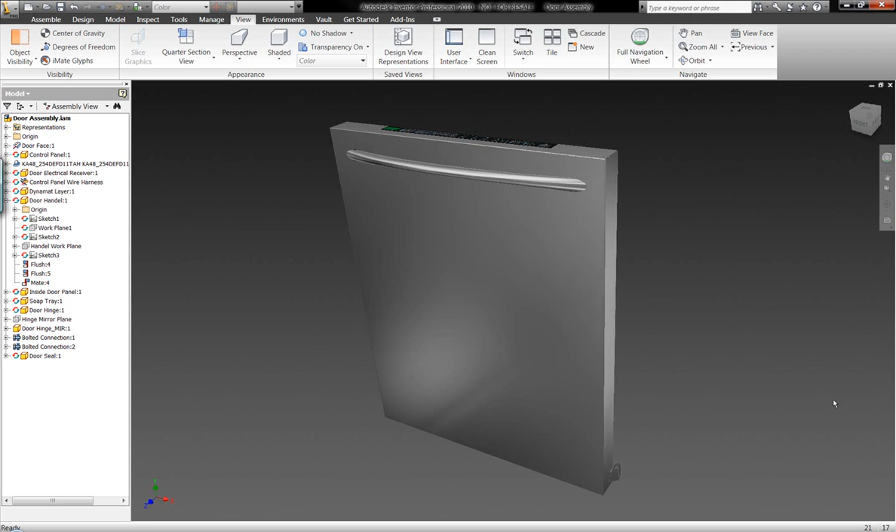What I want to take a look at now are some of the finite element analysis capabilities within Autodesk Inventor. With my dishwasher at home, one of the things that I often experience is my son climbing on the door itself, allowing too much force maybe applied on these hinges or different components of the door assembly. This might be a concern for a designer or a thought process of a designer of how to build more of a quality component. Now, one of the things that maybe I want to analyze is the overall assembly.

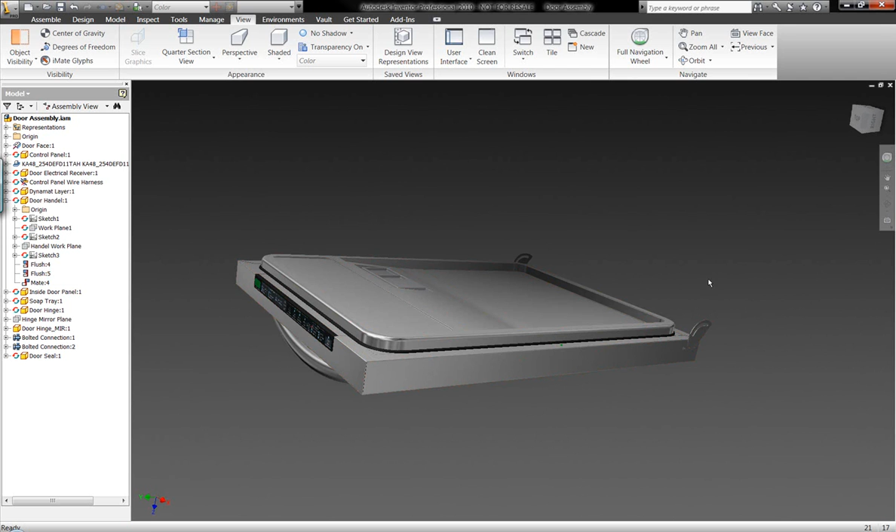Autodesk Inventor in an integrated environment allows me to analyze full-blown assemblies as well as specific part components within my assembly. I'm going to go ahead and open up a specific component to show you and introduce you to some of the finite element capabilities within Autodesk Inventor's interface.

As we work inside the environment in this part model, we can simply switch to our stress analysis environment without ever leaving Autodesk Inventor. Autodesk Inventor allows us to generate a variety of different types of finite element analysis studies. Here we're simply going to run a static study on this component or on this hinge piece of geometry.

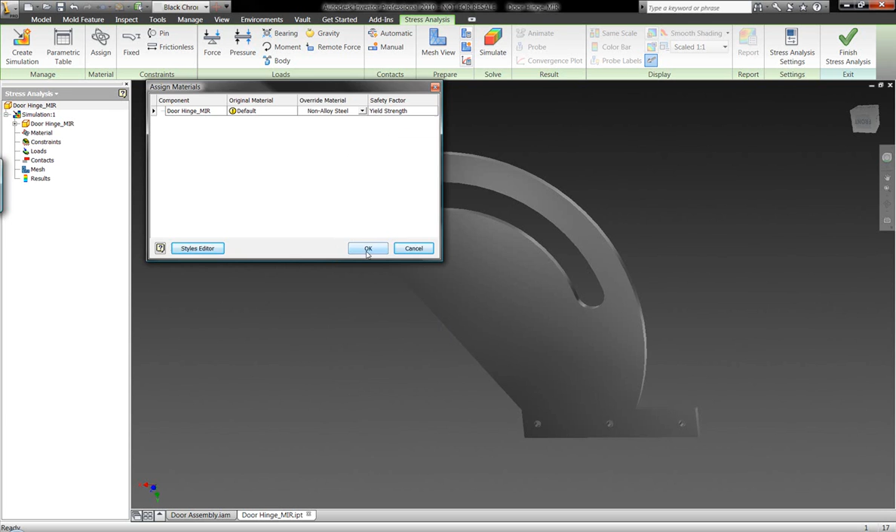We have the capabilities when working with Autodesk Inventor to integrate the materials that are defined within the Inventor part model into the stress analysis environment. If we haven't placed or if we want to change these materials, we can override these materials inside the interface. This makes it possible for us to create multiple studies with multiple different types of material components on the different parts within the assemblies that we're working with.

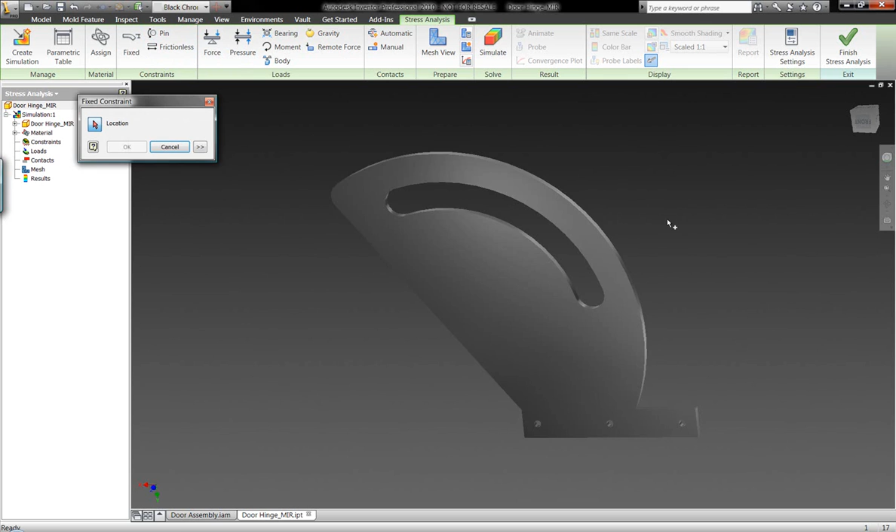We can also go into the environment and start to lay out how we want to hold or restrain different components within the model. So we can go through and fix some of the geometry, for example, and maybe I want to fix off these three different pieces of surface geometry here. I also want to go in here and generate a force load on, let's say, a specific face.

So I want to go ahead and analyze my son climbing up on this dishwasher unit. I want to apply a maximum force to the geometry. Maybe I want to figure out what the maximum force is within my assembly. I have capabilities of doing that as well using some of the simulation tools within Autodesk Inventor and pass those forces directly into a part. I can also analyze or approximate those different components within this part environment as well, individually.

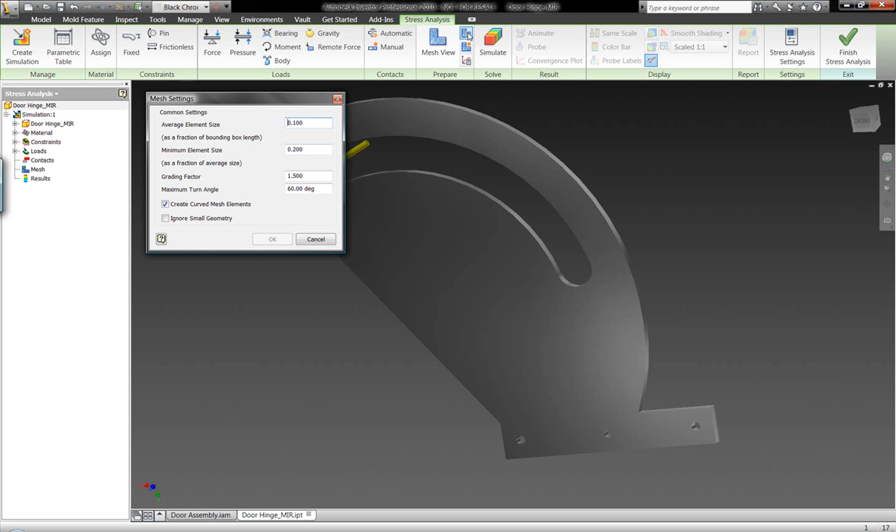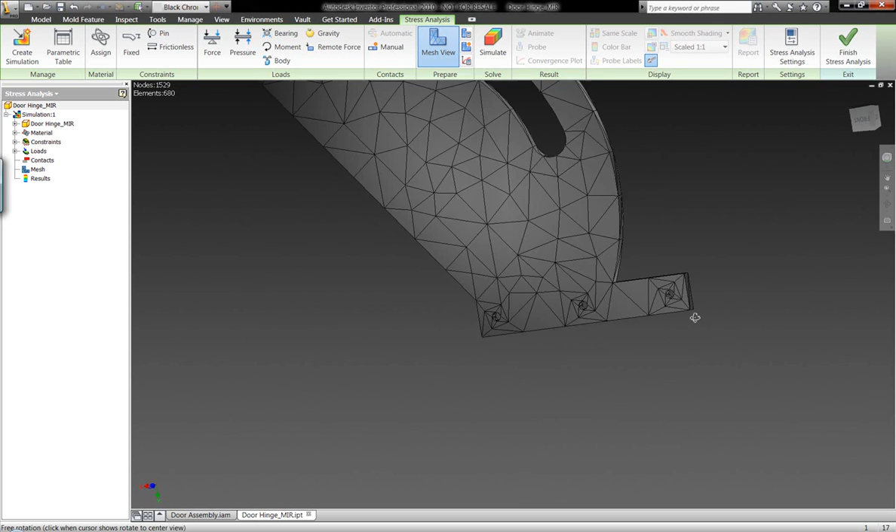I have the capabilities when working with the geometry to control what size mesh is being generated on the model. I also have capabilities to use local mesh control on the geometry to apply a location where I want maybe a more detailed mesh region on my component. I can also use the default mesh settings and mesh my component. We have capabilities of meshing this geometry as one of the fastest in the industry, above and beyond some of the capabilities that our competitive products have, and at much faster speed than our competitive products are offering.

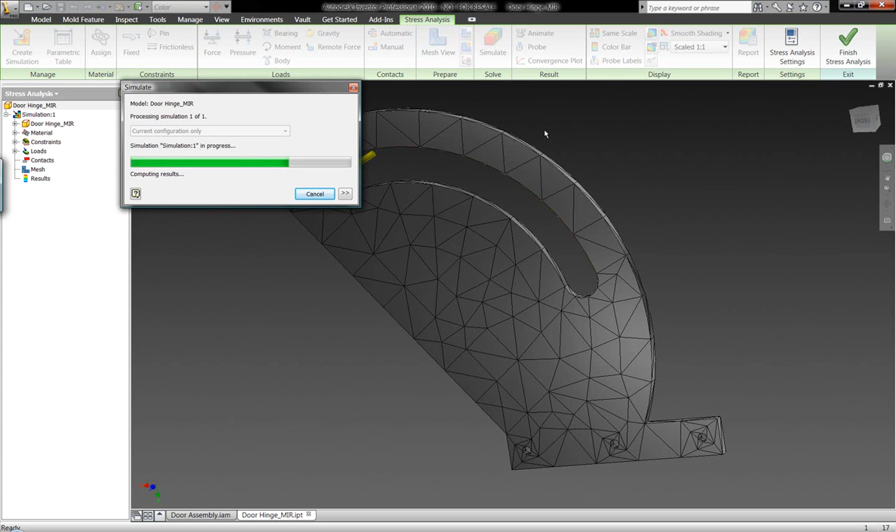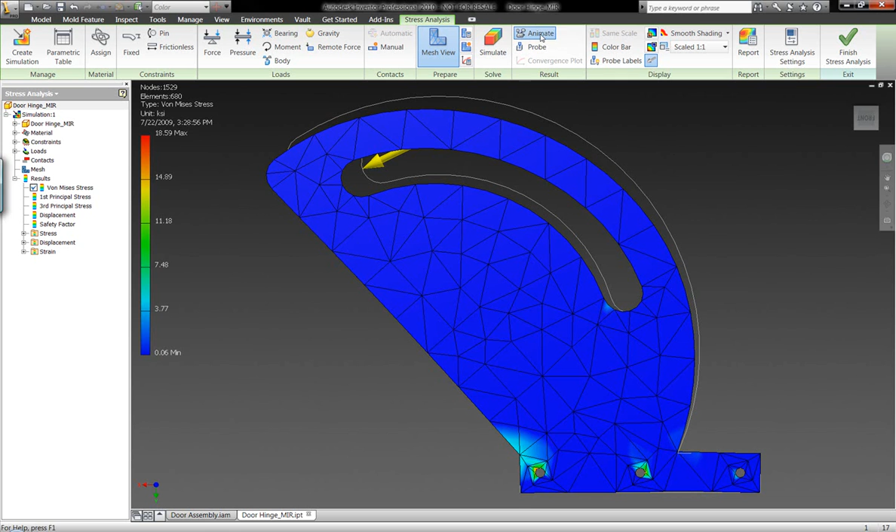Once we've set up the different situations that we want for this geometry, we can simply run the simulations that we've applied. So we've applied a series of forces and restraints to this component. We now want to take a further look at the overall geometry that we're working with. How does this component react? How are we going to visualize this component moving in a variety of landscapes with a variety of different types of materials? Very easily we can take a further look and understand how this component moves in relation to its original shape.

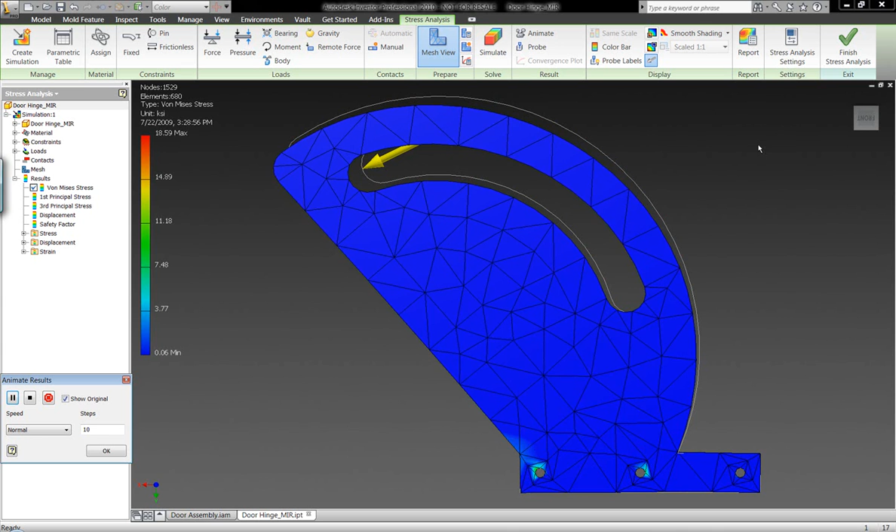We have the flexibility of generating a full-blown report so that we can send this off to customers, publish it on websites, or save this off with our original part files. Here we can see on this model, if we go to the factor of safety plot, that we have somewhat of a low factor of safety or low confidence on this component. So maybe we want to beef this up just a little bit, or we want to thicken up the model to ensure that we're at a higher factor of safety.

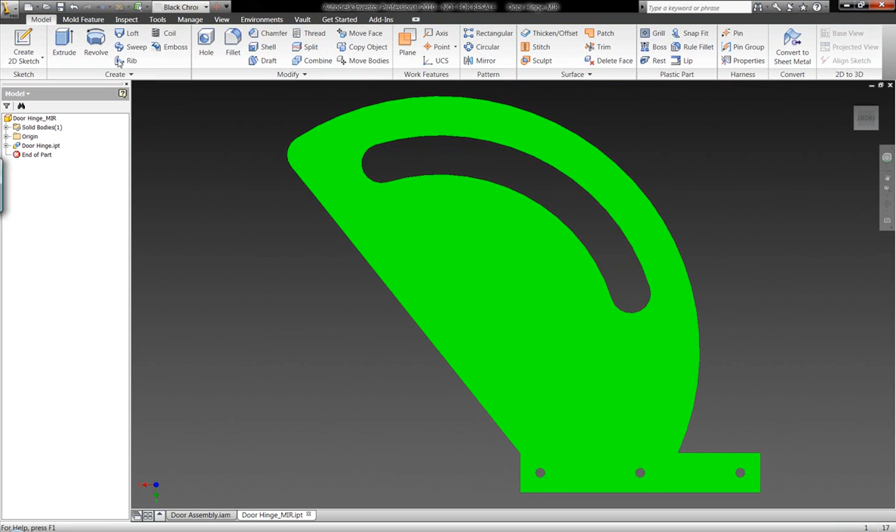So very easily we can go into the original model and generate some additional thickness to this geometry. So maybe we want to thicken up the component a specified distance, 0.1 inches in addition to the original thickness of the model. We can simply do that within Autodesk Inventor.

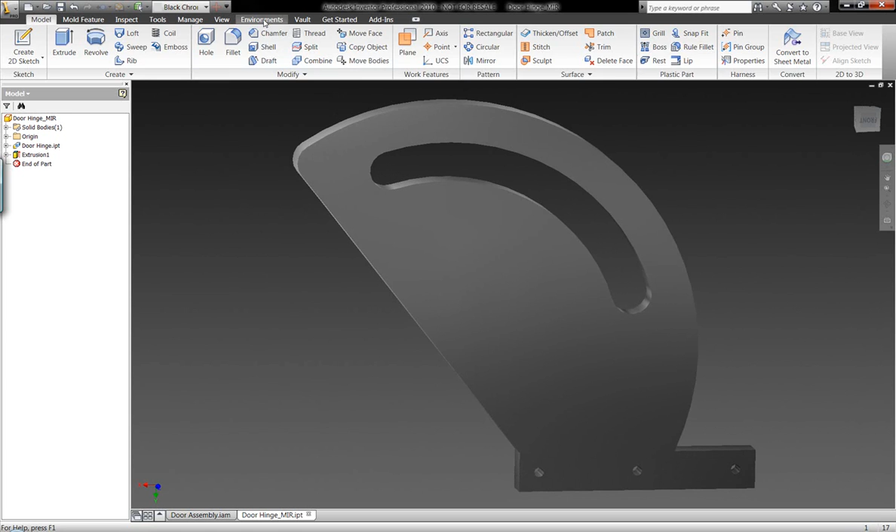And we can go back into the stress analysis environment once we've updated those components, and we have the capability of automatically updating the different contacts. We also need to update the mesh geometry because we've changed some of the overall geometry on this model. Very easily we can go in, rerun this analysis within a matter of seconds, and start to evaluate our new results. Let's go ahead and take a look at the new factor of safety.

Now we're within a range of reason that we want on this geometry, more in the 3.85. We can build this component, start manufacturing this component with confidence. Autodesk Inventor's stress analysis environment is one of the easiest to use in the industry, and also gives us the most confidence when working with finite element analysis results within Autodesk Inventor.